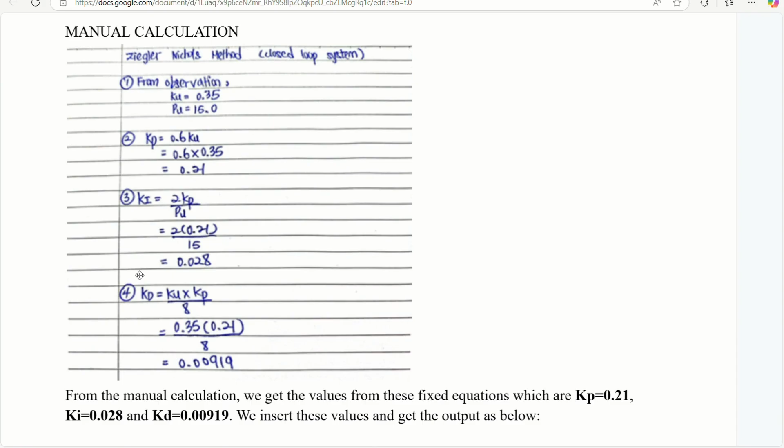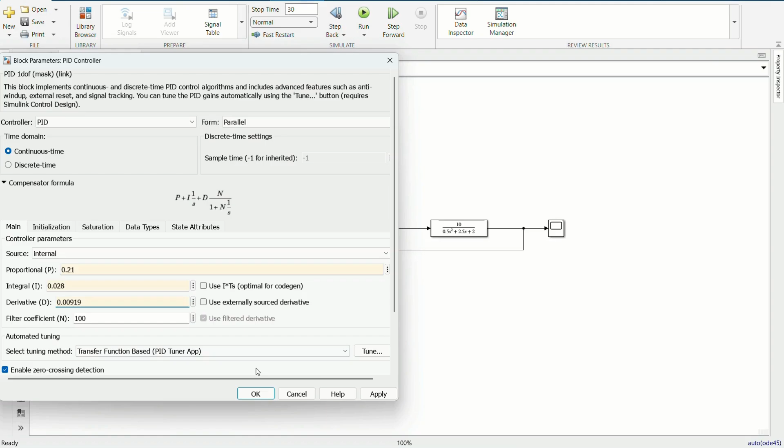Next, we insert the value into the PID controller and see what output graph appears. So we insert it: 0.21, then 0.028, the last one is 0.00919, and then we apply, OK, and run the circuit again.

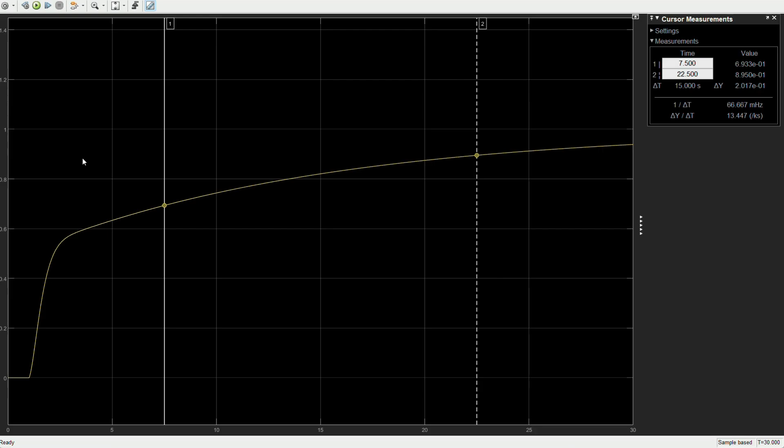So we can see that the output graph is not the ideal output from the desired input, so we try trial and error again.

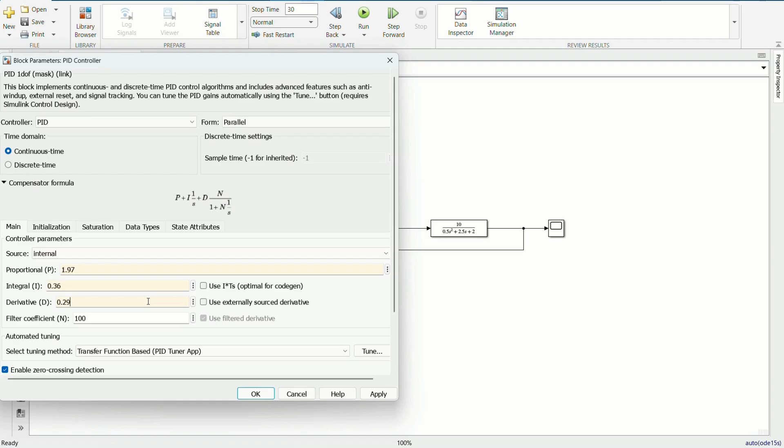For this one: 1.97, then 0.36, the D value is 0.29. Then we place it and run the system.

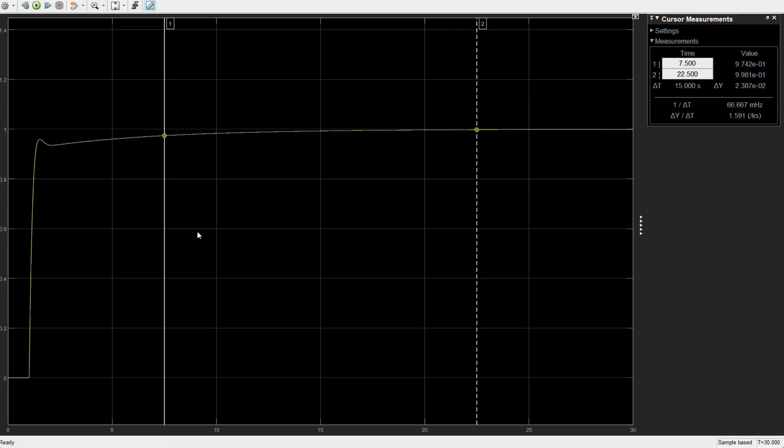So we can see the graph. Oh, this seems like our ideal output for the closed loop system. So this is the final ideal output for this method for the closed loop system.

I will explain the combination of open loop and closed loop for two methods, which is PID Auto Tuner and the Ziegler-Nichols method. So this is our combination for the system. First one is the open loop system, second one is PID Auto Tuner, the third one is the Ziegler-Nichols method.

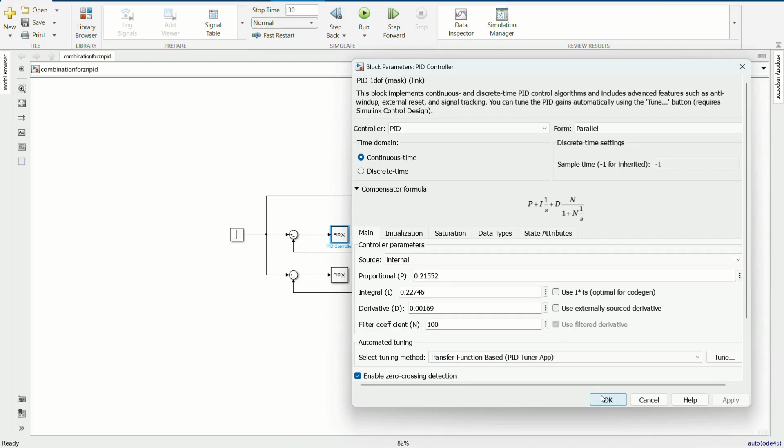So we insert the PID Auto Tuner values: 0.21552, 0.22746, and the last one is 0.00169, and then OK. And then we also insert the value for the Ziegler-Nichols method, which is 1.97, 0.36, 0.29, and then OK.

I will explain the closed loop with P controller using the PID auto-tune method. This is our closed loop by the P controller. We run the simulation and see the P controller.

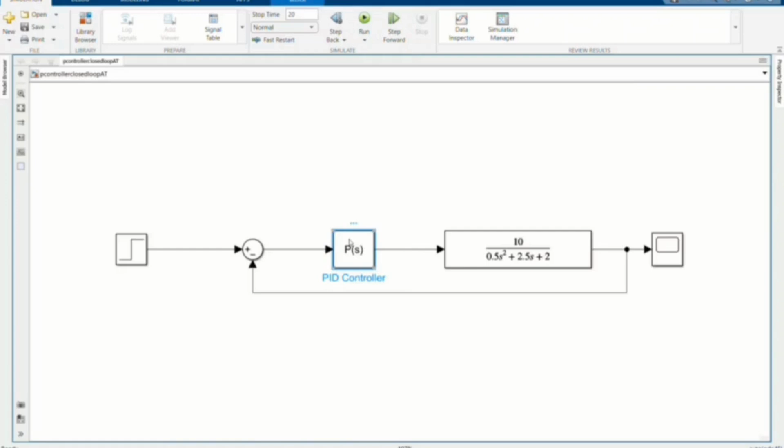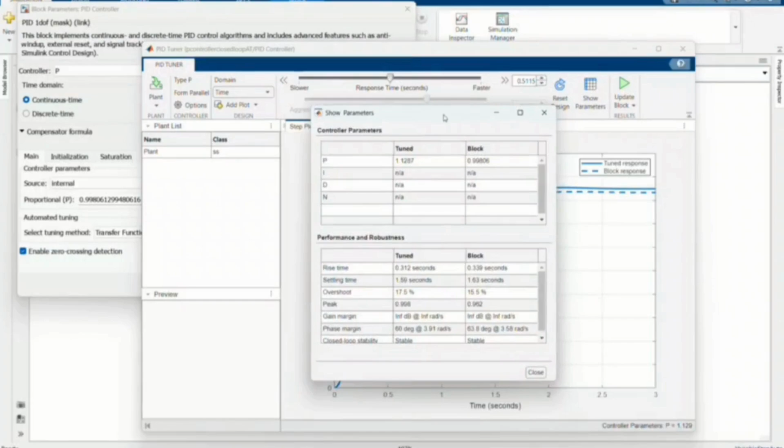As we can see, our proportional value is 0.998. Then we apply it and tune it. We get our output graph, which is below the 1. Then we show the parameter. We can see our overshoot is at...

17.5%. Next, I will explain the closed loop by PI controller using the PID auto-tune method.

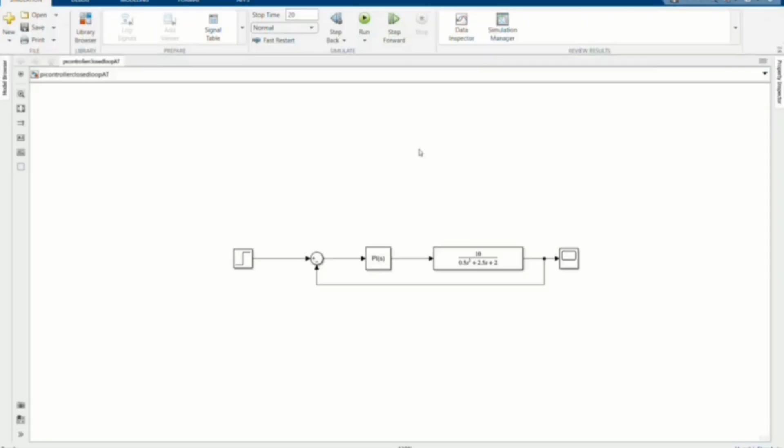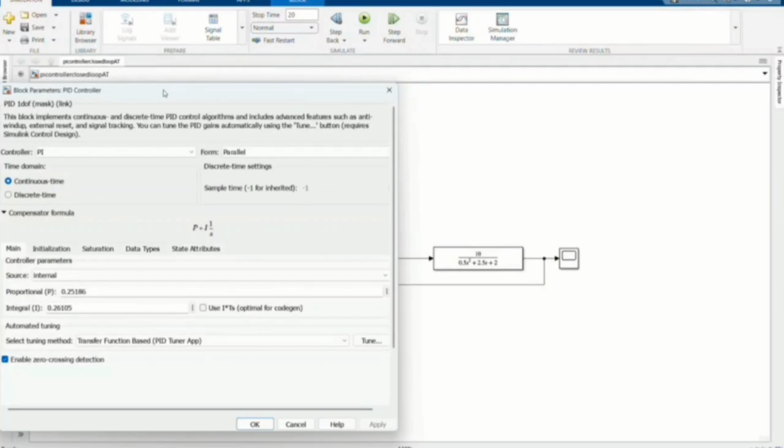This is our closed loop by PI controller. We run the simulation and look at the PI controller. We need to control the proportional value and the integral value.

Then we tune it. This is our output for the closed loop by the PI controller. We can see that the graph is above the 1. Then we need to minimize it.

We try and error for the response time and the transient behavior. We set the response time to 1.879, and for this one we set it to 0.738.

This graph overshoots, so we need to minimize again. We try and error for the response time to 1.63, and the transient behavior to 0.72.

Then we can see that our graph is on the 1 and below the 1. This is our ideal output for the closed loop by PI controller.

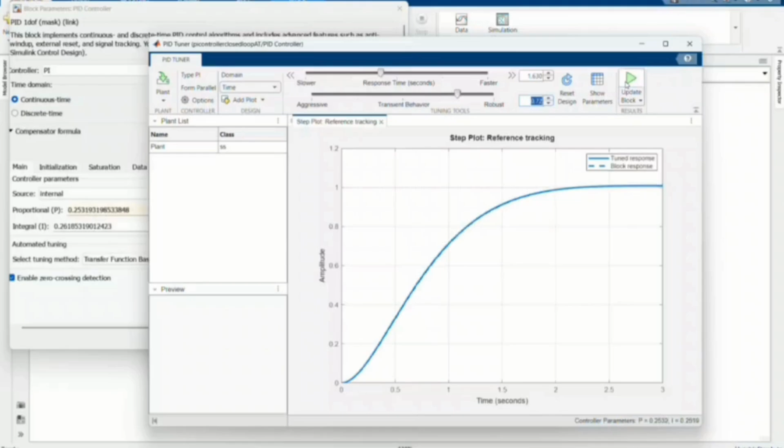Besides that, I will explain the closed loop by PID controller using the PID auto-tune method. This is our closed loop by PID controller system. We run the simulation and look at the PID controller.

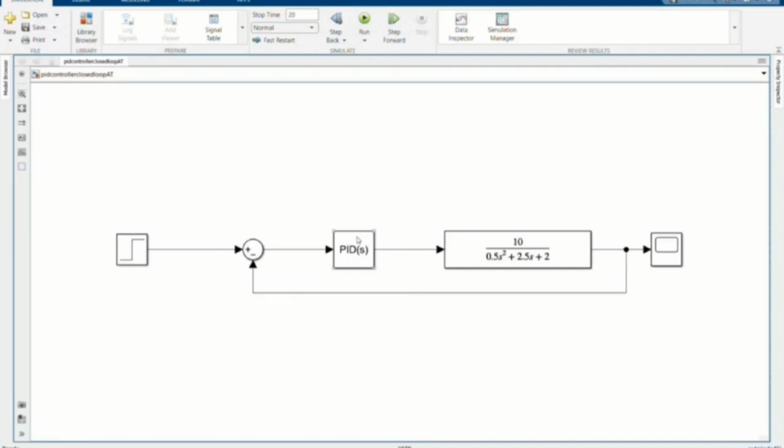We can see that our proportional value is 0.215, integral value is 0.227, and the derivative value is 0.001. Then we tune it.

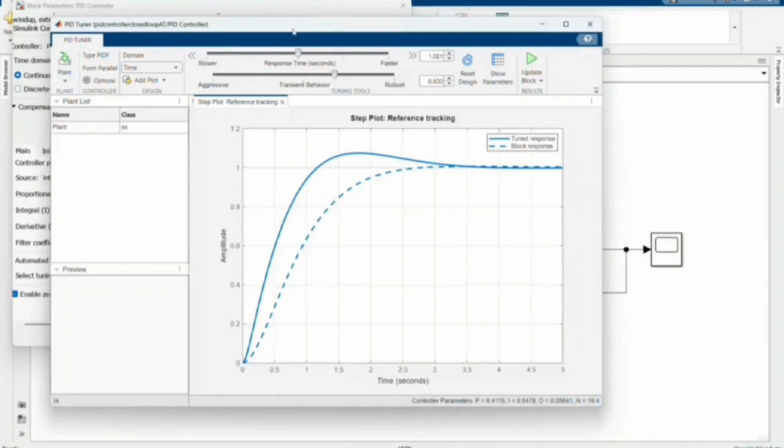We can see that our output graph is above the 1. We can also see the parameters.

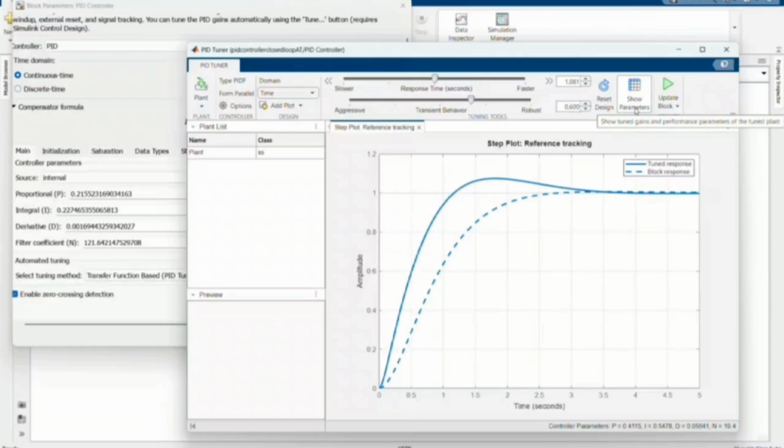As we can see, our output overshoots, so we need to minimize that. We try and error for our response time and the transient behavior.

We adjust our response time to 1.8 and the transient behavior to 0.73.

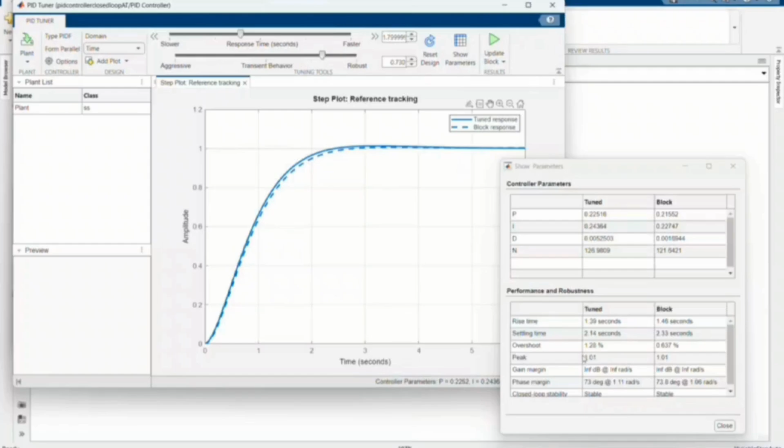This is our ideal output. We can see our overshoot is 1.28%.

The combination of the PI and PID controller using the PID auto-tune method. This is our combination for the PI, PID controller system.

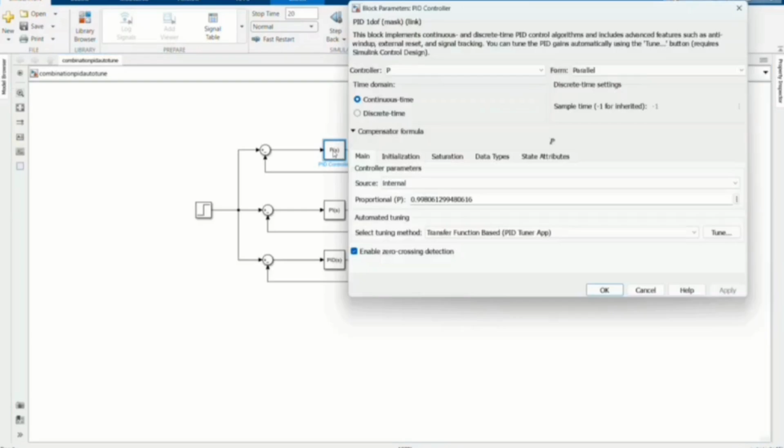We can see that our P for the proportional value is 0.998. For the PI controller, our proportional value is 0.25 and integral value is 0.29.

Then for our PID, our proportional number is 0.21, integral number is 0.22, and the derivative number is 0.001.

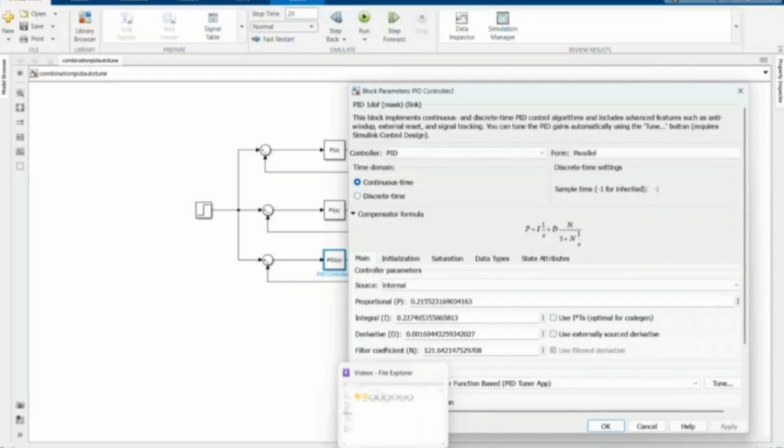Then we run the simulation and see the scope. This is our ideal output for the combination of the PI and PID controller.

The yellow line is for the P controller, the blue one is for the PI controller, and the last one, green-orange, is for the PID controller.

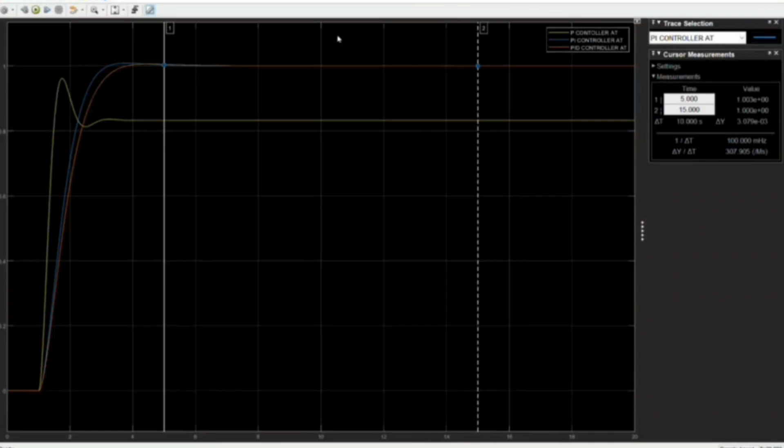I will be presenting 6 SDGs about our product: SDG 7, 9, 13, 6, 11 and 14. The liquid tank achieves several sustainable development goals.

The liquid tank supports the transition to cleaner energy sources if used to store renewable fuels such as biodiesel and ethanol, or to manage energy resources. In SDG 7, affordable and clean energy, it helps reduce reliance on fossil fuels and contributes to sustainable energy.

Since liquid tanks are mainly used for industrial purposes, they promote innovation in storage and transportation, as well as reducing leaks or wastage. Therefore it contributes to SDG 9, industry, innovation and infrastructure.

Liquid tanks support proper storage of harmful chemicals or fuel, ensuring minimal environmental impact, reducing emissions and contamination risk. Hence this contributes to SDG 13, climate action.

If liquid tanks are used for industrial or agricultural purposes, they contribute to SDG 6, clean water and sanitation, because they ensure efficient resource management, particularly in water-scarce areas when the liquid is used for irrigation.